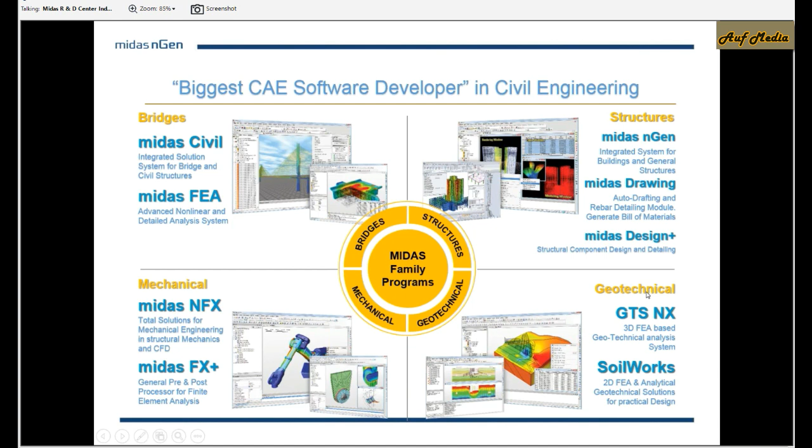Let's move ahead to the introduction to midas nGen software solutions. midas nGen is our next generation solution for building analysis and design. You no longer have to use a separate analysis tool, a separate design tool, and a separate drafting tool, because everything is included in midas nGen itself.

It's a one-stop solution like drawing to drawing. You can import an architectural drawing, then generate the model, perform the analysis, perform the design, generate the reports, also the quantity takeoff, and finally provide a structural drawing as an output. So it's a drawing to drawing all-in-one design system.

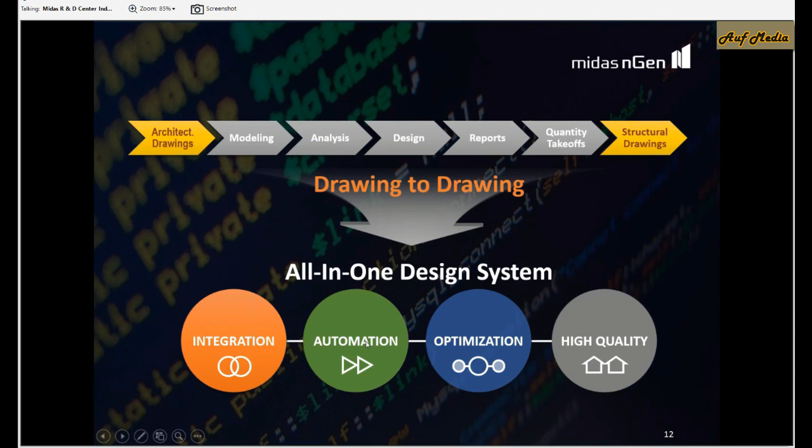Let's look at its major strengths in the parts of integration, automation, optimization, and high quality. When it comes to integration, we can see that modeling, loading, analysis, design, and output, everything is integrated into one solution.

Modeling becomes easy and fast as it has CAD-based modeling features. For loading, we have auto generation of specialized loadings like lateral loads, wind loads, and seismic loads. For analysis, we can perform multiple types of analysis in a single model file. For optimal design, we can optimize the structure by considering the rigid zones.

We can get the auto generation of the output in the form of drawings, Word file, or Excel sheets. We get the quantity takeoff in the form of Excel sheet, report in the form of Word file, and drawings in the form of DWG files.

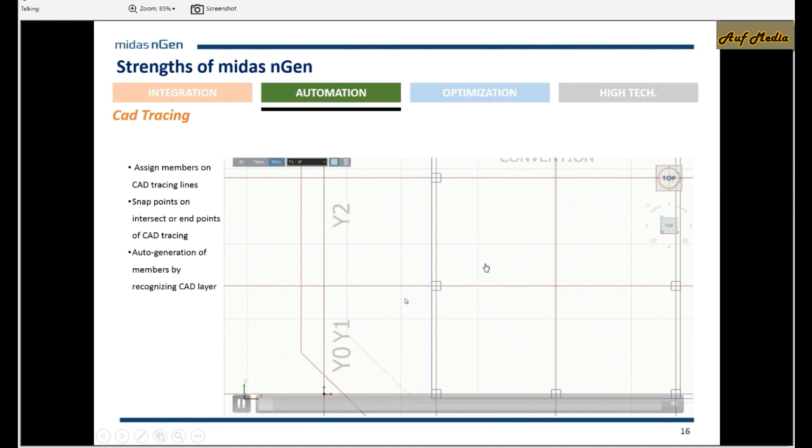Let's look at automation in the part of modeling. We have a tracing type of option that can help automatically define the different section properties of columns and thickness of shear walls. We can also trace the location of beams using the center line.

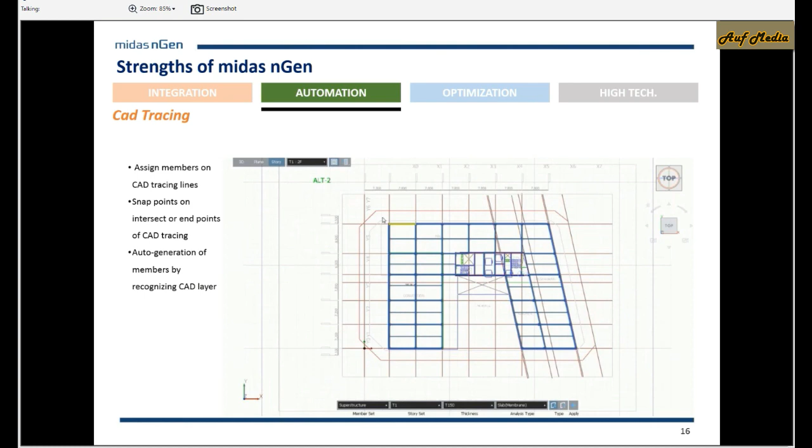We can manually draw using CAD-based features. We can trace the periphery of the slabs and generate the slabs. Whichever slabs we don't want, we can simply select and press delete from our keyboard. So that's a tracing feature, a CAD tracing feature in midas nGen.

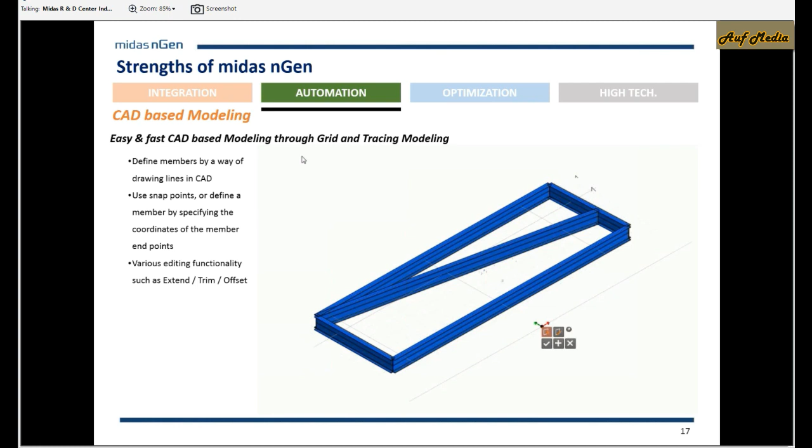There are some more CAD features for editing purposes like move, copy, stretch, extend, trim, and we can generate any shape of opening.

We can also create general types of shapes because midas nGen is also capable of performing analysis of general structures. So you can have very easy modeling.

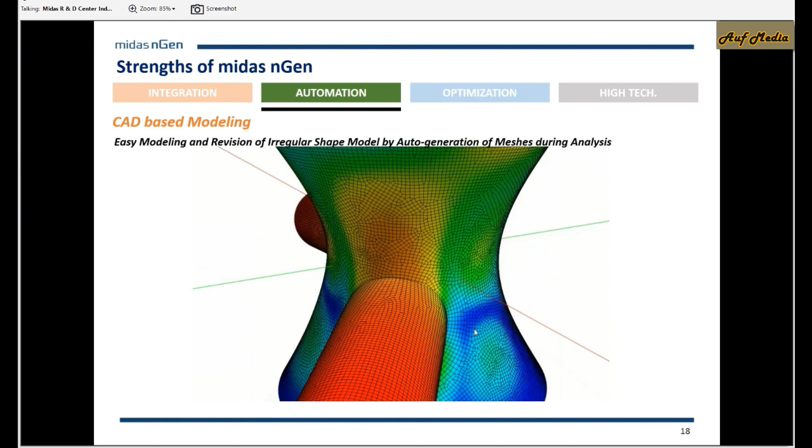The good part is that you can have mesh of any size, and that meshing can also be modified easily by simply going to the settings. There is basically an auto meshing feature, which happens during the analysis, not before the analysis.

Another good part is that midas nGen has all types of foundations: strip footing, isolated footing, mat footing. When it comes to plinth beams, you can model them as footing girders, pedestals below the steel columns. And we can also include basement walls and apply earth pressure on the basement walls.

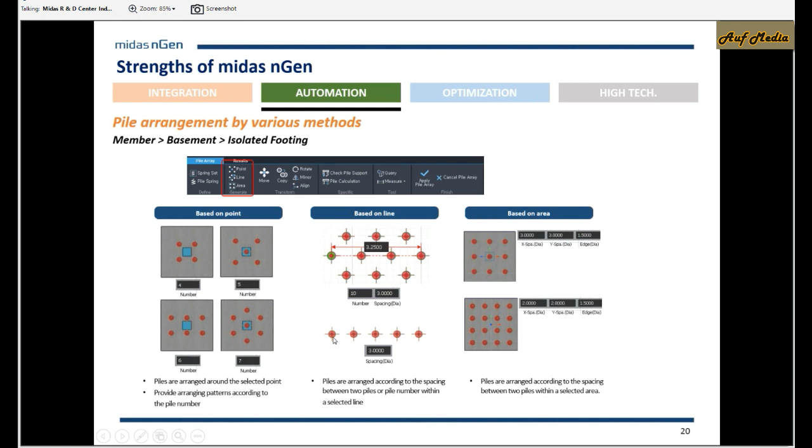Apart from that, we can include our pile arrangement or pile supports below our mat foundation, or you can call it a pile cap in that case. So that's about different automations in the modeling in midas nGen software solution.

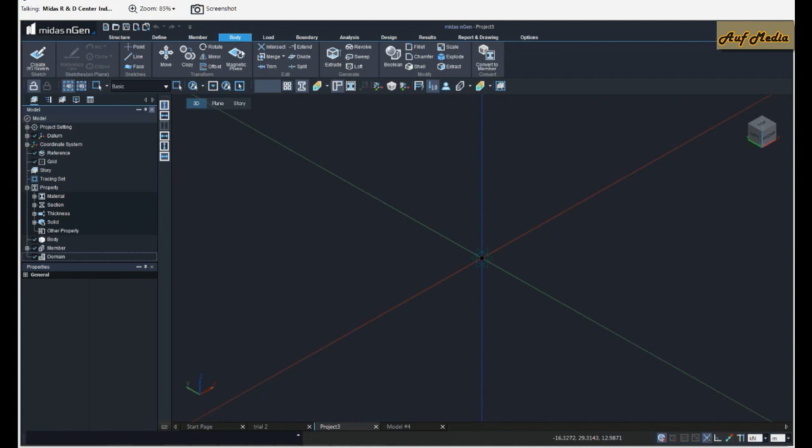In today's session, I'll be showing our 3D grid line. This is our 3D grid line basically, and we can choose the X direction, Y direction, and levels for our grid line. For example, I am having, let's say, 6 numbers in the X direction, and in the Y direction, I've got some 7 numbers of bays, and we can have different information for the spacing between each bay.

So let's say this is 6 meters. Like this, we can provide information, and for levels, we can also provide the levels and the height for each level. So I'm providing, let's say, there are 10 floors of 4 meters height. I can just click on apply and press escape to come out of the command, similar to AutoCAD.

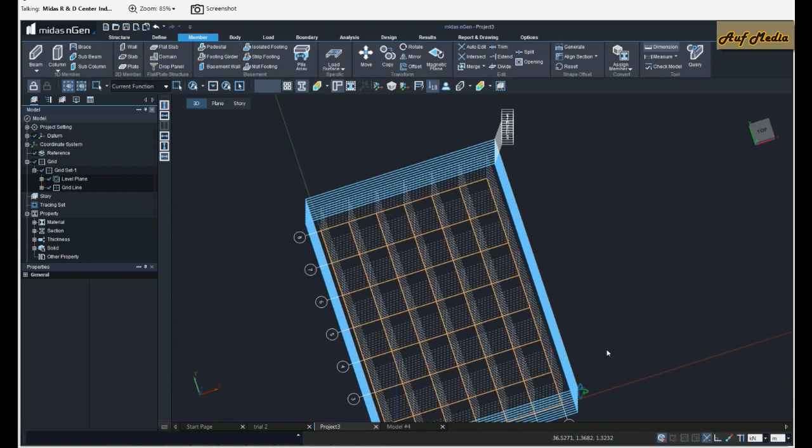All right, so here we have got this information. Now, if we would like to modify this grid line, we can do it easily. We have some options here like dimensions, wherein you can actually select the dimension for the grid lines, and they can be modified, so you can change the size.

For example, let's say over here you don't want 6 meters, you can change it to, let's say, 3 meters, press enter, and the grid line is modified. So it's that easy. Same thing over here, 3 meters, likewise. Press escape. So very easy to edit the grid line by simply changing the numbers from the display.

Another thing is about converting our grid lines into members. You can actually select the type of member you want to generate and the section property. By default, there are some section properties already generated in midas nGen, and even the material properties are predefined. Those can be modified, or you can add some more.

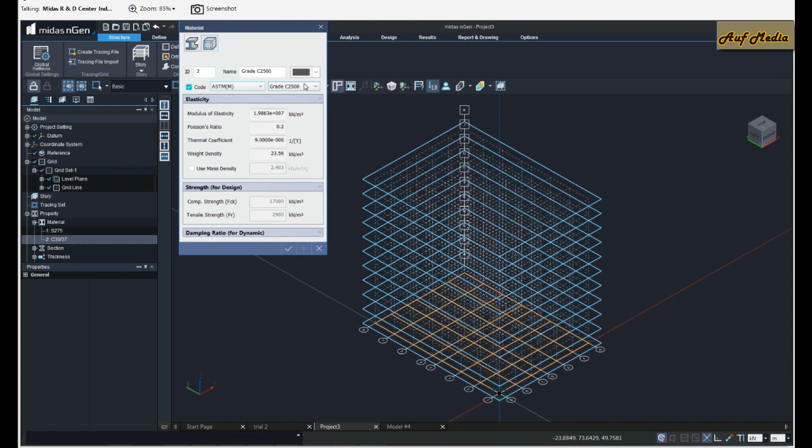Here I'm going to be modifying the grade of concrete. It's by default as per European standard. We can change it to American standard, so I'm using C4000 here, and I'll click on OK.

The section properties are also given over here, and these also can be modified. There are some thickness properties also which can be modified, or you can add some more thickness properties. For example, I would like to add the thickness for the mat foundation as 0.5, and I click on OK. So it's there. Very easy and handy tool.

Now I'll use my convert into member option to select the section size of 400 by 600, and I'll simply just make a selection for all the beam members, horizontal grid lines, and I'll click on apply. So we can see over here all the beams are generated.

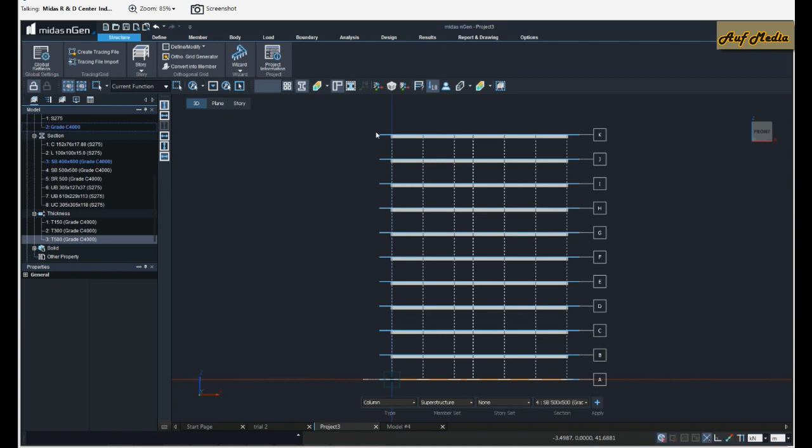Then further we can also create columns in the similar way. I'll use section property as 500 by 500 and select the entire floor plan. Apply. Okay, so we have got our beams and our columns. I can press escape to come out of the command.

And let's also make some shear walls. I'm going to make shear wall at this location, and that's why actually I reduce the size. I'll again press spacebar to come back to the same command. So if you are into modeling, you can understand how easy it can get if we have the same features as AutoCAD, like spacebar to come back to the same command. So wall, here we have got wall. I'll change the thickness to, let's say, 300.

And we have different types of analysis for wall. Now, wall will definitely be designed as a shear wall in midas nGen, but when it comes to the analysis, there are different methods. We have wall membrane, plate not meshed, which is a shear wall made up of rigid beam at the top and bottom connected by a long column. And then there is wall plate meshed, which is a plate element itself, which will be meshed by the program while analyzing.

Here I'm going to be using wall plate meshed, and we will just simply select the periphery of the shear wall. So I've just selected this periphery right over here, and we can also look at the preview of our shear wall, which is going to get generated. And then I click on OK. So I've got my shear wall modeled.

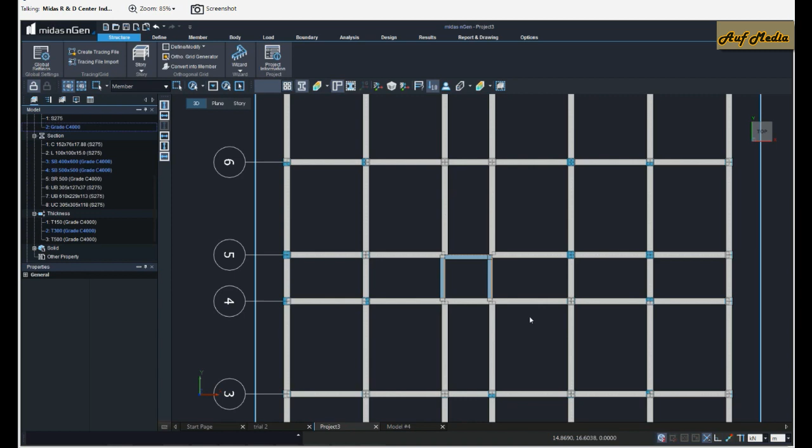Now I do not want the beams and columns surrounding it, so I can actually choose to delete only my beams and columns by making a selection filter. I'm just going to be selecting beams and columns in these locations and simply press delete from the keyboard. So here we go. We have got our shear wall as well.

Okay, now let's get to generating the slabs. So we can go to the member, go for slab option, and we can select all the periphery beams. Here I am going to use 150 thickness for the slab, and I'll use slab plate out in, as in it will take the in plane as well as out of plane stiffness. If you want to take only the in plane stiffness, then slab membrane should be used.

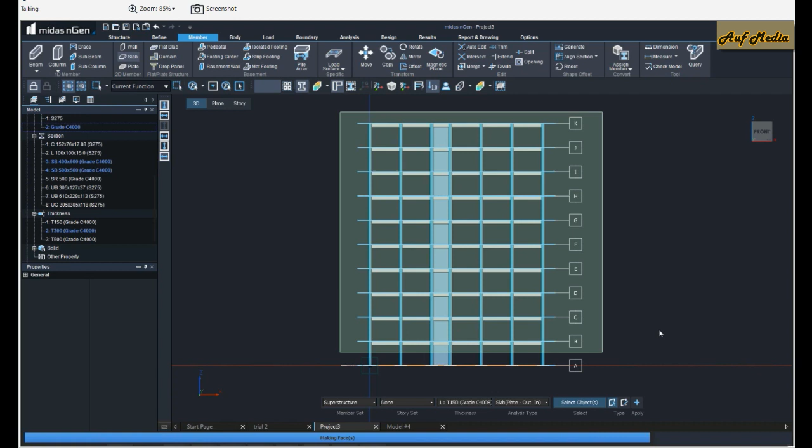Okay, and then I'm just going to select all the beams. The program will automatically detect the periphery and then only create the slab members. We can also generate these slabs using the periphery grid lines, so that option is also available. After this, we can just click on apply. Basically, the program shows us a preview, and then we can go ahead, click on apply if you're okay with whatever is going to get modeled.

Okay, so our slabs are there with us. While performing the analysis, the program will automatically do the meshing of these slabs. Now, the locations where we do not want the slabs, we can just simply select and delete those locations, or we can even create the openings. So these are certain options available.

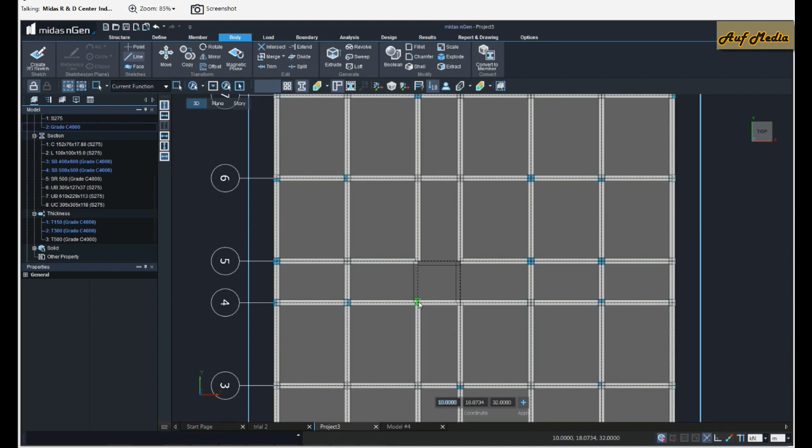So if I go for the line over here, I create the periphery of my opening. So let me go to this plane view and go for a line. For example, I'm creating... so basically we can either create lines or we can even select the periphery. So here I'm going to go for the member opening, and I can do the selection, and I can say apply.

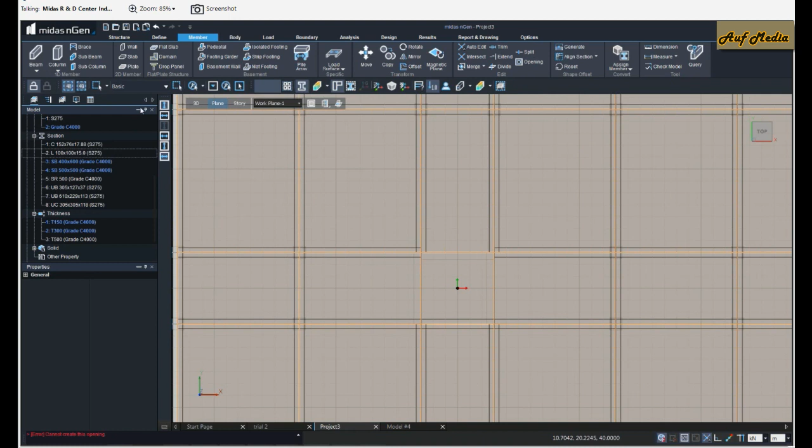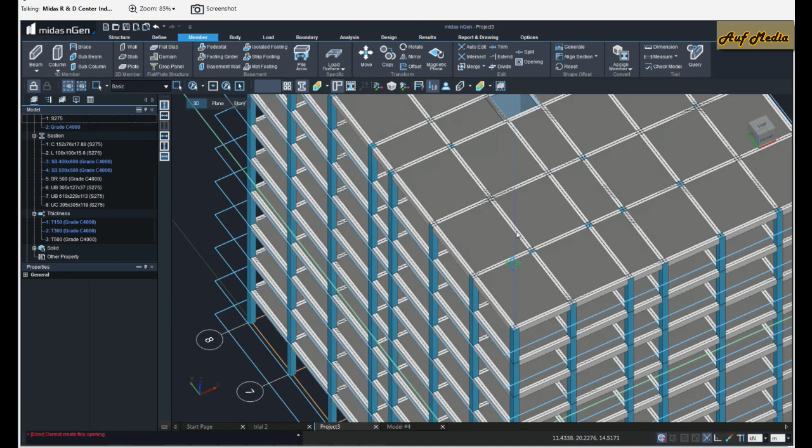Let me go for basic so that it's properly selected. Okay. 2D. Okay, and then press delete from here. All right. So we are done with creating the openings as well, wherein the shear wall was placed in between. Now, if there are any further modifications, we can do that.

For example, if you want to make an irregular floor plan, you can just delete some parts of it. For example, I'll just delete this much portion, and you can make it L shape or any other T shape, maybe perhaps like this. So I'm just making it an irregular plan. All right. And further, you can simply go ahead with generating the stories for it.

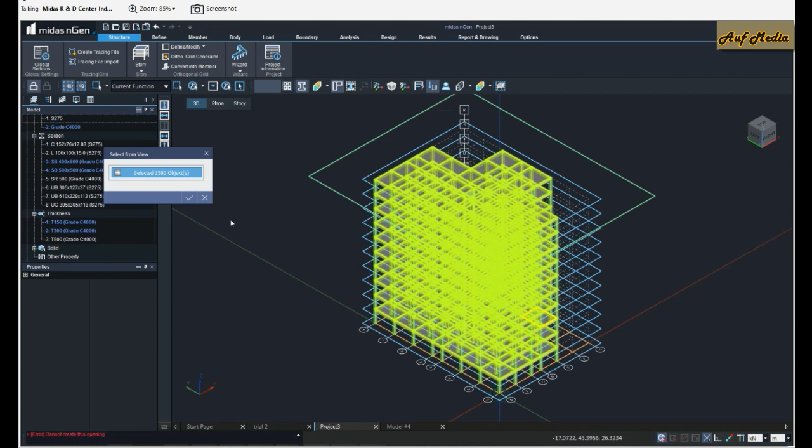Now for generating the stories, you can go to the structures and story data and add this information, and you can even auto-generate the story data. No need to manually provide the information. Just select the members and click on OK. The program will automatically detect the height. The height can be modified from here. The floor-to-floor heights of each floor can be modified from here.

Now we do not need the grid lines anymore, so I'll just hide the grid lines. And we can go to any story using this story mode to do any modification. For example, I would like to add my mat foundation on the lower level. So I can go to the story and 1F level, and I can go ahead to add the member for my walls, for my footing. So I'll just click on the periphery.

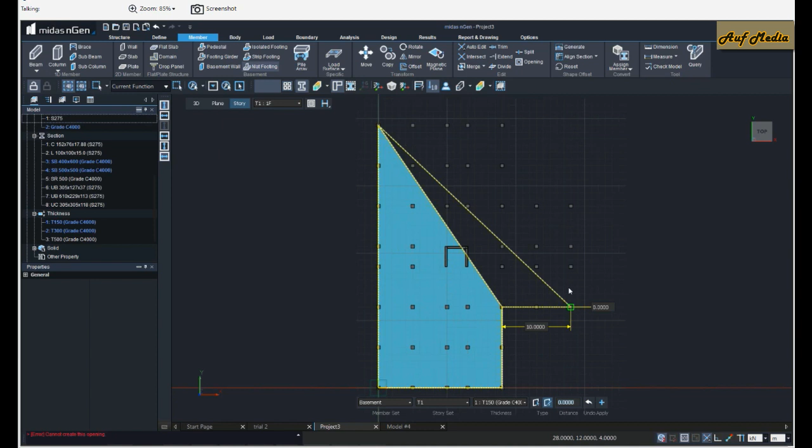I'm sure I need some offset. So for that offset, I can provide a distance here of, let's say, 1.5 meters and press enter. So I've got my mat foundation with offsets. I can also include pile. Now piles over here cannot be designed. These are only to apply the spring support to our pile cap.

So I'll go ahead with definition of a spring set here and pile springs. So we have a database of Korean standard and Japanese standard, so you can use it if you want, but I'm not going to use that. And I'll keep the information for the pile as it is right now and use the pile bearing capacity information. So let's say each pile has the capacity to bear 1000 kilonewton of compression and 100 kilonewton of uplift.

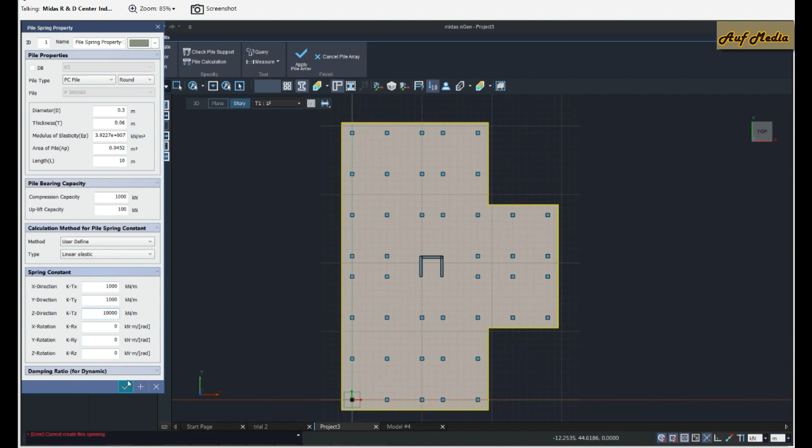And then the spring constants I can provide over here. For example, I'm providing 1000 in the X and Y direction and 10,000. These are just arbitrary values. Of course, the actual values would be different. Okay, so I provided the spring set and pile spring information. And now let's say I want to apply the piles just below these columns. So I have various options to generate these piles. I can do it by point, I can do it by line, area, and so on.

So I'm going to be selecting point, and I'll have the selection tool to select all the locations right below the columns. Okay, so this is selected right now, and I'll click on apply. We can also change the number of piles over here. So let's say below each column you would like to have two. So you can write 2, and as you can see, there will be two piles below each column. So I'm making 1 for now, and I'll click on apply.

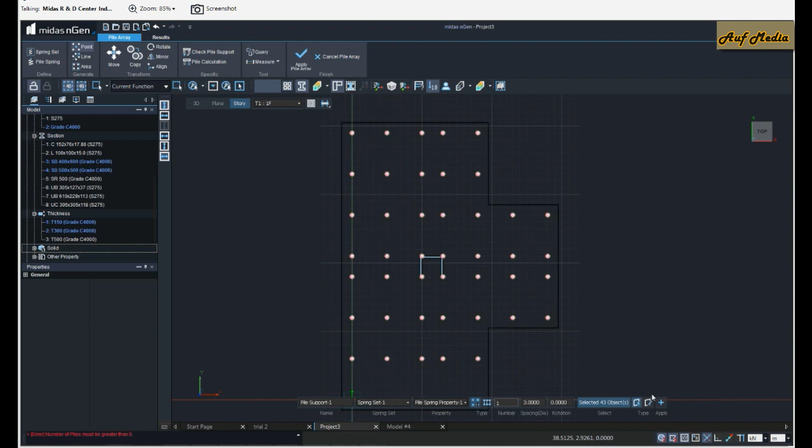So modeling these pile supports is actually very easy. I'm pressing escape, and then we just simply click on pile array apply. So we have got our piles just below our entire structure. So after this information is completed, we can simply go ahead to the next part of modeling. Well, we can also choose basement walls. So if you want basement wall, there is a basement wall option available as well.

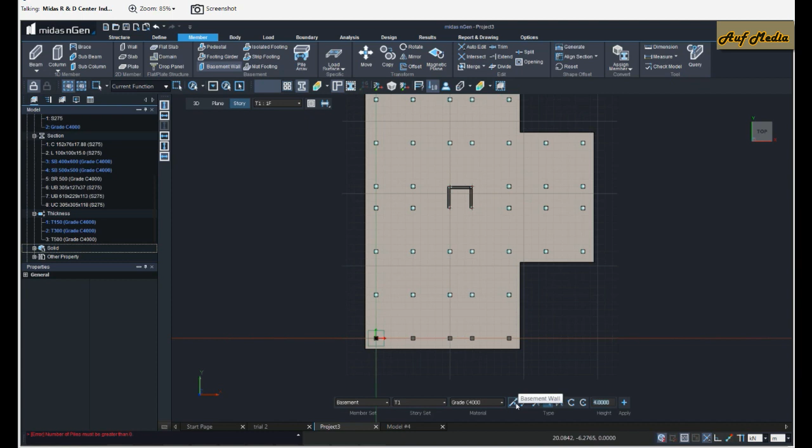Well, we can go to the T1F and you can model the basement walls by using reference lines or by using select parallel lines and so on. So there are different options available. Okay, so you can choose basement wall here, and then you can click on 2 points. And you can just make the basement wall in this way.

So easily create the basement wall. Modeling actually becomes very easy in midas nGen software for all the types of members. Okay, so this is, oh, I missed that other part. Anyway, so basically this is how we can do the modeling of the basement.

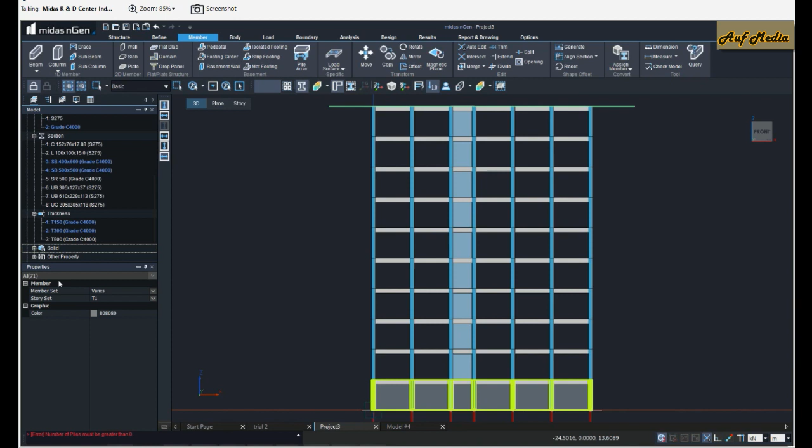And I'll get back to the 3D mode now. We have our entire structure. So let me also see, I think I've provided incorrect thickness for the basement walls. I'll select the basement wall and I can modify the thickness from this properties menu. So I made it 300 and that's it. So easy modification of the properties for any member can be done over here as well.

All right. After this, we can move ahead to the next part, that is loading. In the loading, there is load set command. So you just have to click on load set. The set, that is a static load set, is nothing but our load case. Why is it called set? Because it's also like a group which can be activated or deactivated in an analysis case.

Okay, so we have one load set applied, and then we can apply point loads, beam loads, pressure loads, temperature load, settlement, and arbitrary loads. Arbitrary loads would require just creating some faces on the floor, and then you can apply any pressure load on it, or line load wherever the lines are created, or point load wherever required on the slab.

Now, when it comes to slab, be it a simple type of slab or a flat slab, you can also assign slab load by using types option. You can include your dead loads as well as live loads in the same type. You can create as many types as you want. So here I'm creating a typical slab load type with floor finish of 1.5 and live load of 2.5. These are arbitrary values, of course, it would differ with your projects. And then further, okay, let me save this model file.

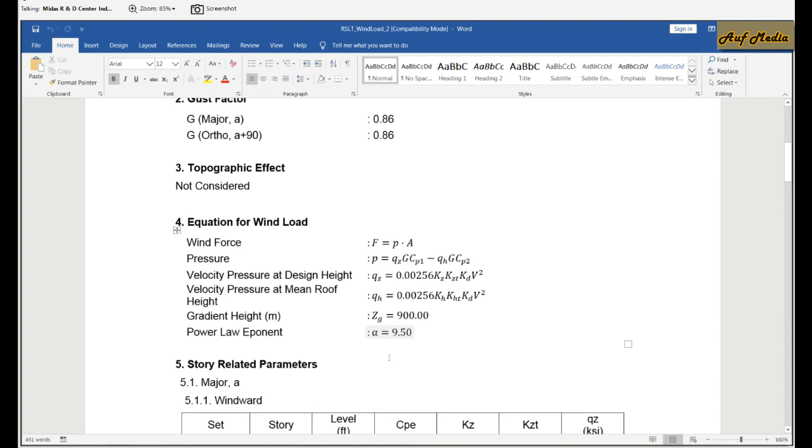Only the external pressure will be considered here. And it is going to be windward and leeward, orthogonal in the direction. So you get all this information in the Word file format itself, and you can click on OK and then use it for the structure. You can even look at the forces applied before performing the analysis.

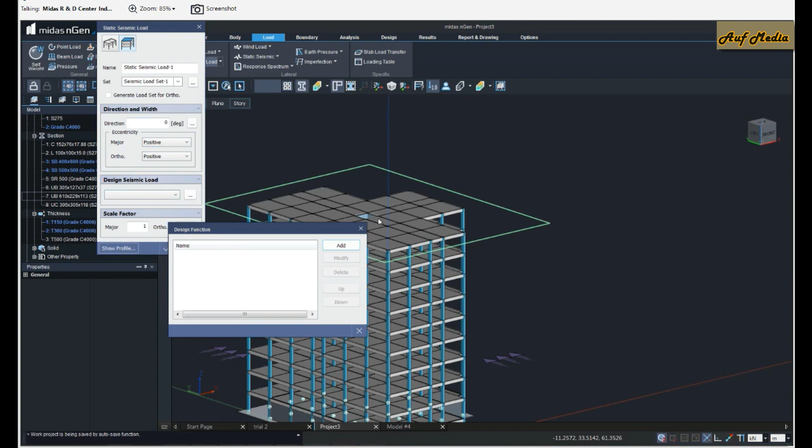Okay, so after this is done, we can go ahead to static seismic load. And again, the static seismic load can be automatically calculated as per UBC or IBC or ASCE 7-05 or 7-10. So if you're using UBC 97, you can select the soil profile. You can select the seismic zone, 2A, 2B, whatever, and then importance factor, and also approximate period, which can be calculated automatically as per the required formula.

So you can simply press on calculate and the calculations would be done. You can also manually provide the value of the approximate period. The ductility factor can also be modified over here. For example, 5, and then click on OK, close.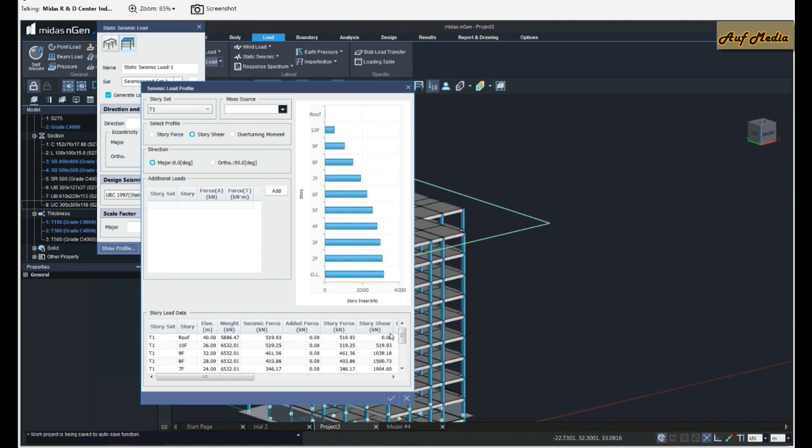You can apply the seismic load in both X and Y direction at the same time using generate load set for ortho and providing a scale factor for the orthogonal direction. You can look at the profile of the base shear. So this is the base shear even before performing the analysis. Okay, and you can click on OK and OK so that the seismic load is applied.

Now, when it comes to seismic loads, you also need to perform the loads to mass command, as in you need to convert your 100% dead loads and 25 to 50% of the live loads. So I'm converting 25% of the live loads into masses, and that's it. So the masses are also automatically calculated by the program.

All right, so that was about the loading part, wherein we saw how the lateral loads, that is wind and static seismic, can be applied. Now, if you're using the wind tunnel test loads, then you can go to the show profile over here and apply additional loads for each story set and stories separately. There is an Excel copy paste option as well to do this very easily. That's about wind tunnel test results that we can apply.

Okay, so that was about the automation in the loading part, wherein we saw that the wind loads can be applied on building structures, on enclosed open structures, and we can also apply on equipment-based structures by converting the forces from reactions. Now here we are having automation for the seismic load as well. Static seismic we saw, but there is also response spectrum.

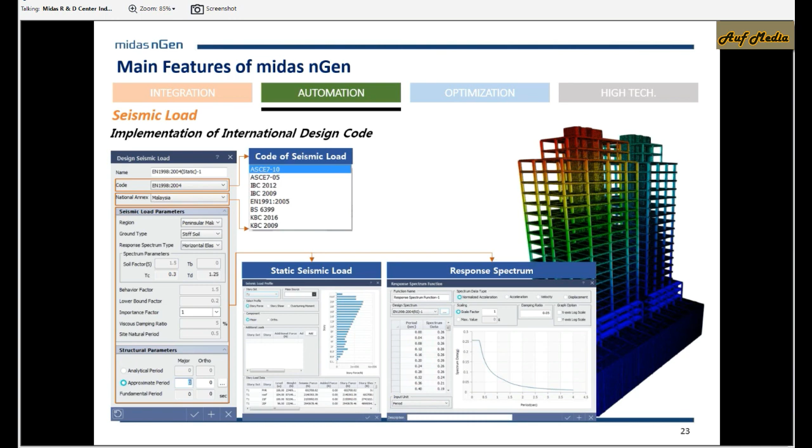And now let's come to the optimization, wherein shape offset can also be automatically applied by the program. So for that, we can go to member and we say generate, and for that we need to basically select the entire structure. So I'm selecting everything and I'll click on apply, and the offsets will be generated by the program, as well as the rigid zones.

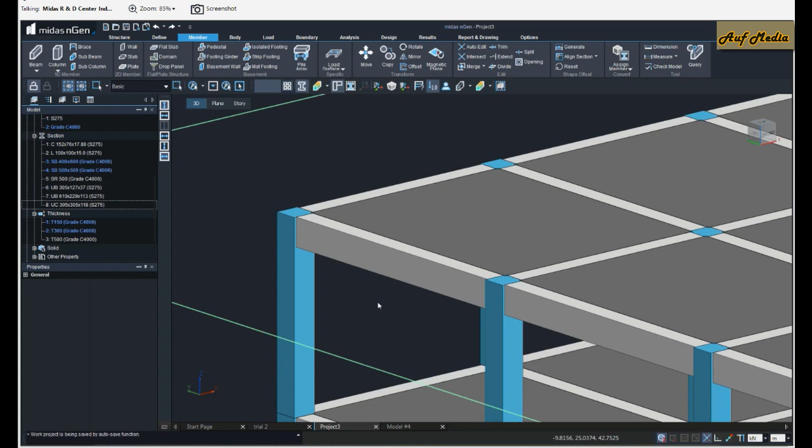One good part is about aligning as well. We have this align section option, wherein you can select your beam and select the plane and then assign it or flush it to the required plane. For example, flushing it to this column. So this is how easily we can create the offset to the beams. So it's an easy feature. I've undone it. And next part in the loading is about earth pressure.

So in the earth pressure, we have earth pressure function, wherein you can specify what is the ground level. So let's say 4 meters for our structure is the ground level. The water level is, let's say, at 1 meter height, and the bottom level is 0. Soil density is 18 kilonewton per meter cube, and internal angle of friction is, let's say, 30 degrees. And if there is any additional load on ground, you can add that as well. For example, 5 kilonewton per meter square. And then click on calculate. The triangular and trapezoidal loads will be automatically calculated by the program.

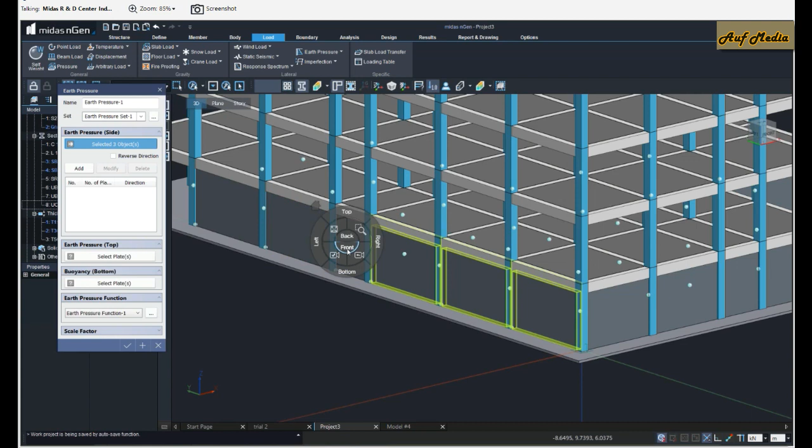Now, once this earth pressure function has been auto-calculated, you can simply select the basement walls and apply the earth pressure function on them. So I'll select these basement walls and I'll just say show only. It's basically easier to do this option. We can also apply to plate type of shear walls, but I'll be applying it only to the basement wall. So I select this basement wall, I click on add. The earth pressure is going to get applied from outside, so it's correct from here. I can select this, click on add, so it's correct.

So we can add one by one to understand if any part is to be reversed. So we can reverse this and again add over here. I think reverse would be required for this as well. So modify. Okay, reverse this. Okay, I think this one also requires reverse, and so would this. Okay, so we have applied the earth pressure loading. We can apply the earth pressure loading in this way.

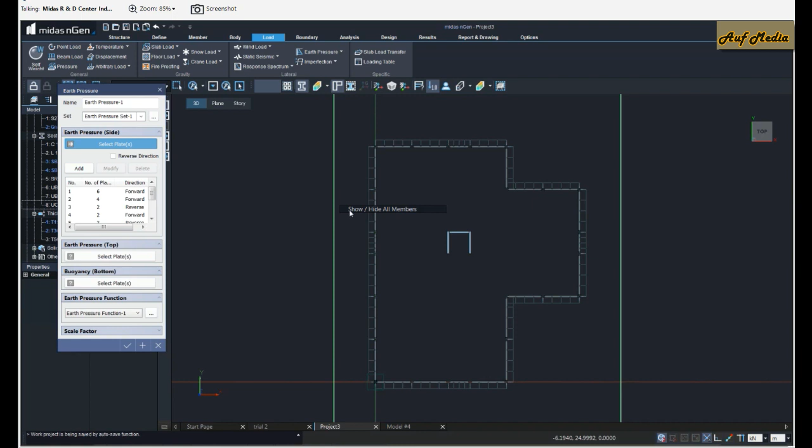And we can also consider the buoyancy at the bottom. So you can select the plates for the buoyancy. So there is buoyancy bottom. You can select and you can just click on OK. So in this way, triangular trapezoidal earth pressure loading and buoyancy loading is applied to the basement wall and the mat foundation. All right, so this is one part.

Next, we'll go ahead to the boundary conditions now. In the boundary conditions, there are supports that we can apply, like the fixed supports and the pinned supports. These can be applied to the structure.

Okay, so that's about the support conditions, fixed, pinned, or user defined. And beam end releases, plate end releases options are there. Then there are soil supports that you can include for simulating the soil structure interaction, approximate type of soil structure interaction. There is area type of distributed spring supports as well that can be applied to the face of our mat foundation. So if you want, you can include this information as well.

Wherein the modulus of subgrade reaction is supposed to be applied. So let's say 20,000 kilonewton per meter cube. Okay, and if you do not want to allow any lateral displacement, you can even constrain its points, end points, or all the points by using point spring support or even using the simple support. Okay, so if I go for properties, I can actually have a high stiffness for my X and Y direction just to constrain my X and Y direction for my foundation.

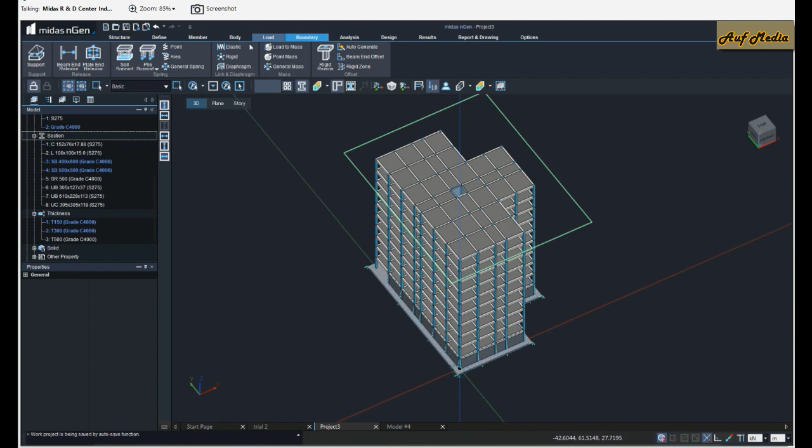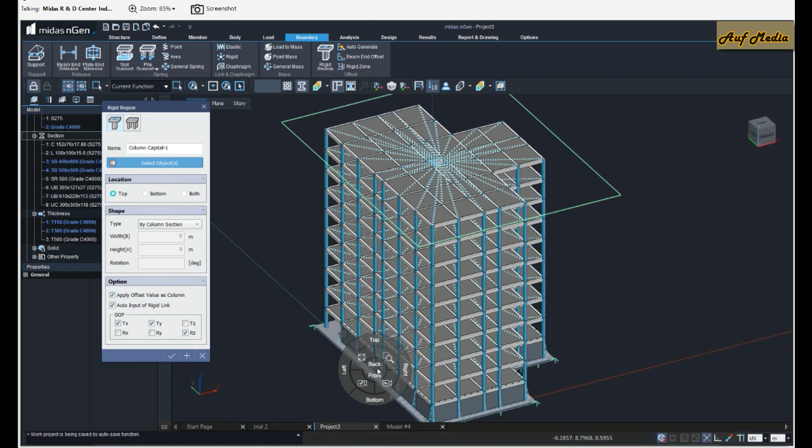Then coming to the diaphragms. So diaphragms can be assigned manually as well. So simply select over here the locations where you want to apply the diaphragm and click on OK. The diaphragms also have been applied to the structure. Coming to the rigid region. Now, when we have got flat slabs or mat foundations, we don't want the line elements to pierce the, or to have high stresses at the connection between the mat foundation and the columns.

So we have got the bottom column section shape with automatic rigid links. So I'm going to be constraining completely, making a rigid zone between the column and the mat foundation. I'll select all my columns over here in this way, and I'll click on OK. And after this is completed, I can simply go ahead and say auto generate so that all my rigid links or my rigid zones basically will be activated, and also the offsets will be considered for the analysis purpose. So this is done. One last thing, I have to also do the modification of the thickness of my mat foundation. It's T500. So now it's complete.

One more thing, I want the program to consider the basement, or the ground level at 4 meters. So I'll have to go to the story and change my control data to 4 meters. I can also choose the options like consider mass below ground level and I can also have inherent eccentricity applied or calculated by the program. Okay, so there are various options available in midas nGen. We are done with the modeling, the loading, and the boundary conditions. Now we can go ahead to perform the analysis.

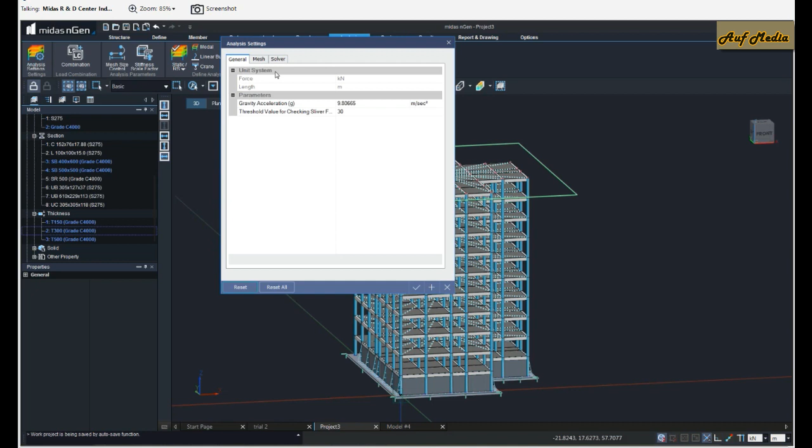Okay, so here we can basically start the analysis settings wherein the mesh size can be controlled. You can also have separate mesh size control on separate members. And you can also choose your number of processors for speeding up the analysis. You can generate the load combinations for steel and concrete separately as per American standard. So here I'm going to change the code to American standards, and we can also choose what kind of rebar we would like it to use. So if you're using ASTM or BSEN, any type of grade of steel reinforcement can be utilized.

And further, there is some checking controls option available. For example, member forces for our mat foundation and for our slab. So you can actually choose if you want the results for element center, nodal results, or nodal average results. And the average design for Wood-Armer moments. Wood-Armer moments basically would consider flexural and torsional moments. And for that as well, you can have the average design forces included for the design purpose. So these are various options available in midas nGen.

All right, so I've used ACI standard to generate automatically the load combinations. So strength as well as serviceability load combinations would automatically be generated. So I'll close this and then we can move ahead for the analysis. Now you can have as many analysis cases as you want for one single model file, which means that you can have, let's say, the entire structure with a fixed support condition, or this entire structure with pinned support condition.

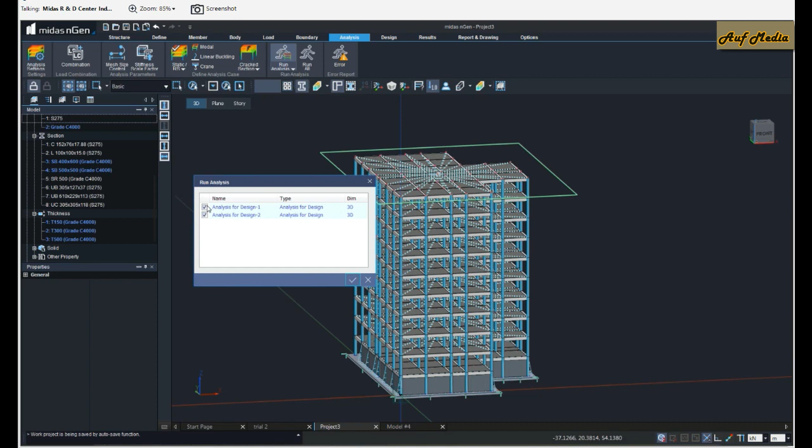Now let's go ahead and run the analysis. We can choose which analysis we want to perform for the design purpose. And I'll go ahead and perform the analysis number 2. This is only to reduce the time for analysis, as there are many members here, and the meshing is also going to take place for all the elements.

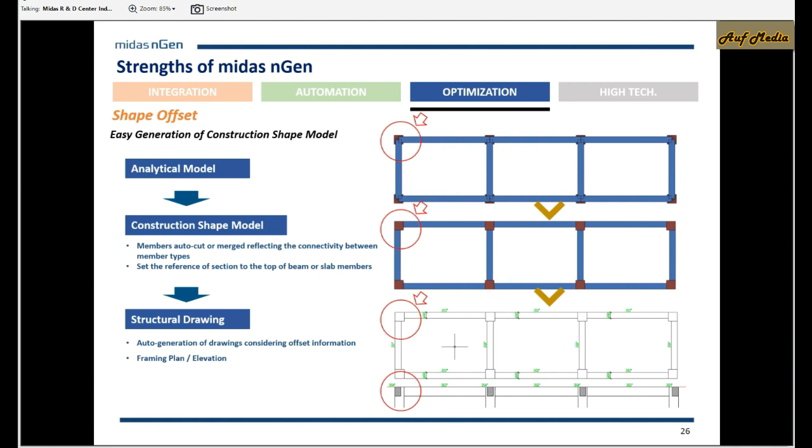Okay, so by the time the analysis is taking place, let me get back to the presentation and let you know that in midas nGen, when we had the tracing modeling option, you can also choose the offset while tracing. Okay, so for example, you have got the center line of your beams, and also you have got the shape of your columns. So if this is the second picture which I'm encircling right now, if this is how your tracing file is, then this offset for each column will be automatically assigned by the program. So again, that's an automation that can be very much useful for making the structure more practical. Okay, so that's one thing.

Next thing I would like to talk about is the wall columns and the plate beams. So when you have got long walls, let's say 1 meter, 2 meter long walls, then those are better to be analyzed as elements. Okay, so we have that option, wall column option, wherein the program will perform the analysis as meshed plate elements, but the design of these walls will be as a column. Okay, so you'll get the column design out of the wall.

Then we have plate beams similarly, wherein you can use it for deep beams or for assigning the drop slabs. So in this case, you have got again plate elements for the analysis, but the design will take place as a beam member. Okay, so that's also an optimization. What all codes do we have for the design purpose? So we have got American Standard, European, British, and Korean Standard in midas nGen for steel and RC design.

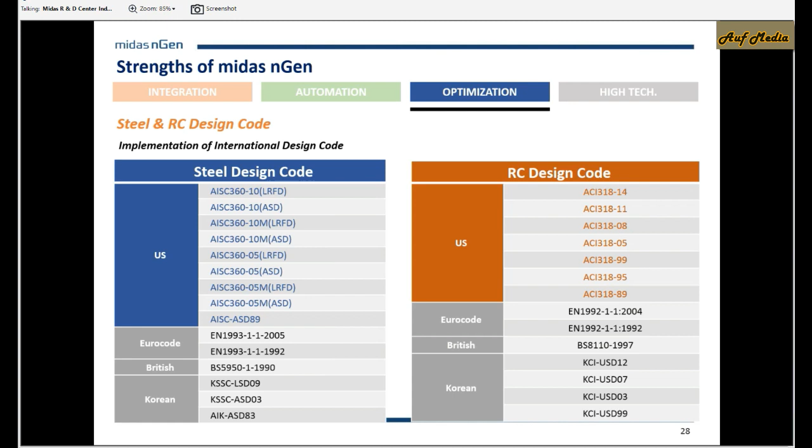And we will finally generate the high quality outputs. We have seen one type of output, which is the Word file output regarding the loads that have been applied, the lateral loads. Okay, the analysis is completed. Now let's look at the results. The analysis results can be easily seen by just expanding the analysis results from the tree menu and double clicking on it. Let me hide all the information labels. Okay. All right. So we have got our analyzed structure.

You can deform it. So this is the deformed shape. You can see the legend over here. You can change the unit system at any point of time. And you can go to any load combination from here as well. So let's say for the serviceability condition, we have 15.78 as the displacement. That's in mm. Okay, you can also display the value on the screen so you can see easily what is the maximum value and where it is. Then we'll go ahead to the results like the reactions.

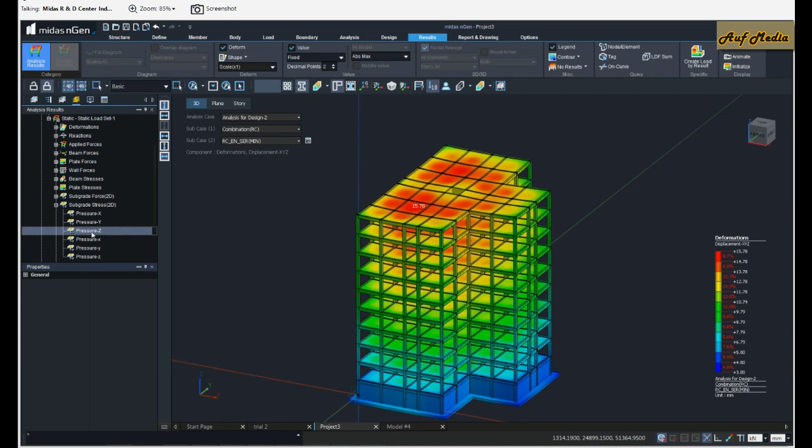Well, when it comes to mat foundations, we need to check the subgrade stresses. So the vertical pressure for our subgrade would also be applicable here. I think it has not been used for, okay, it's available here. All right. So we have got the plate stresses and so on available here.

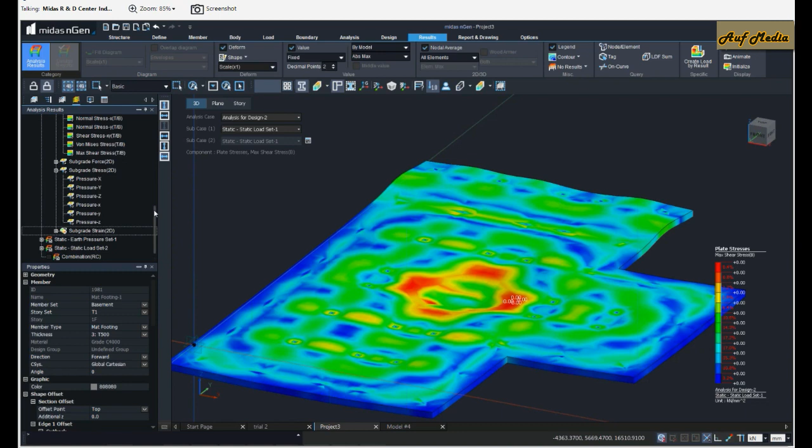So von Mises stresses at the top and at the bottom can be seen separately, and shear stress at the top and bottom can be seen separately. You can actually activate only the mat foundation and view it separately. Care has been taken that the rigid zone is maintained. So that's about the pressure and stresses in the mat foundation.

This subgrade stresses would be applicable when we have applied the boundary condition of soil support. So that's one part. Next is about the beam forces.

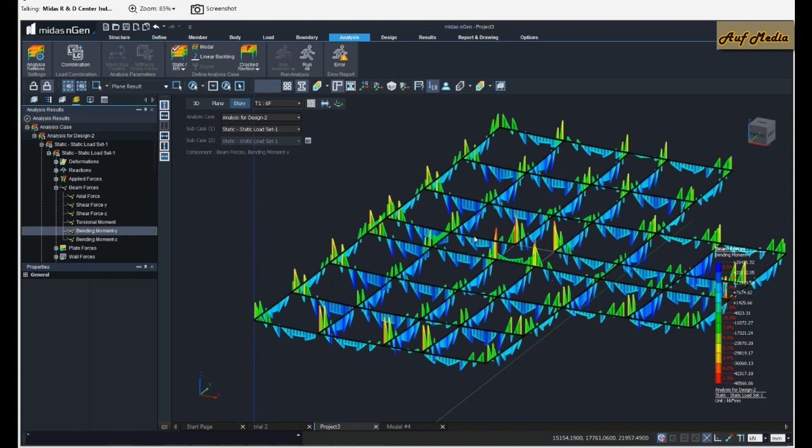If I go for beam forces, bending moment diagrams, we can see that information. We can even go story by story. I'll go to, let's say, 6F level, for example. As the beams are divided into a number of parts because of the meshed slab, we are able to see spikes here, but we can also see a smooth level if we want in the results part.

This is by model, this is by element, and this is by member. So you can see the values for the absolute max. Just change the unit system to meter, kilonewton meter. So yeah, that is it. I'll just do undeformed shape.

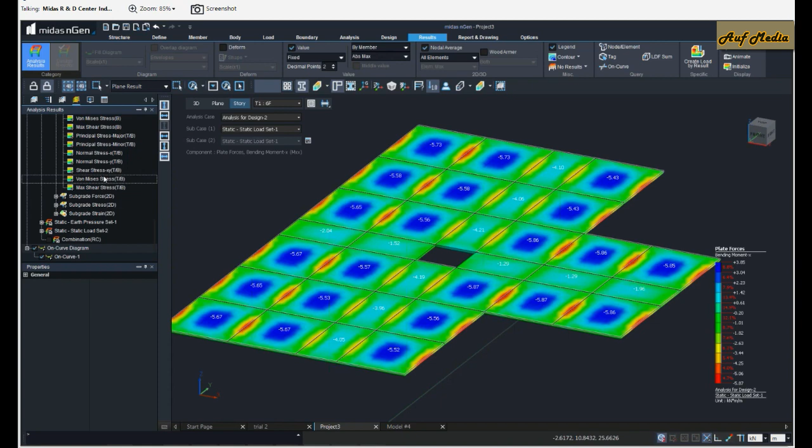One more thing I would like to show is about the forces. Let me show the plates and let's say the bending MXX. You can see the MXX values, and you can also have an on-curve diagram. You can click on 2 points and create the on-curve, and you can get to see the values on the screen for any information. So that's about the on-curve diagram.

And then further we have got different types of options, like there is a tag option. You can actually click on a particular element and look at the results, the values, over here. So that's about the results in the display form.

You can also get the results in the form of tables. For example, you can get the information of nodes and elements in the form of a table, and the deformations as well. You can select the nodes for which you want to check the results, the reaction displacement results. You can also check applied forces, beam forces and stresses, plate forces and stresses, boundaries, and if there are any virtual walls, subgrade reactions, subgrade strains—you can use the tabular information. So that's about the tabular results that can be taken out as an output.

Now we'll go to the design part. In the design, again, we have got different standards available that we already saw. Combination already created. Design groups can be automatically generated for the entire structure. So I'll just click on OK, and the groups would be generated for all the members automatically.

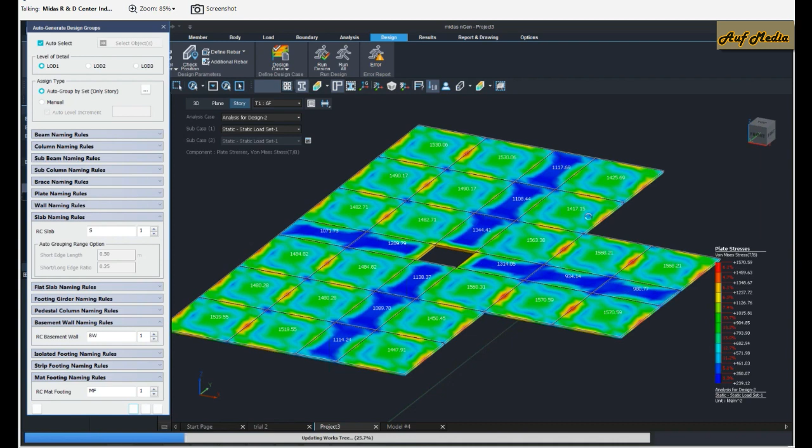So even though we have activated the entire structure or not, the groups would be generated. I'll just initialize the entire structure so that we can see the groups. So there are groups over here based on each story and the section size, section shape.

And further we can go ahead back to the design tab, and then there are member parameters which can be assigned to separate members. We can define the rebars to our plate elements, like the basement wall or the mat foundation, or even our slabs. So here I'm going to create one design case using the analysis for design 2, and you can see here all types of groups are there.

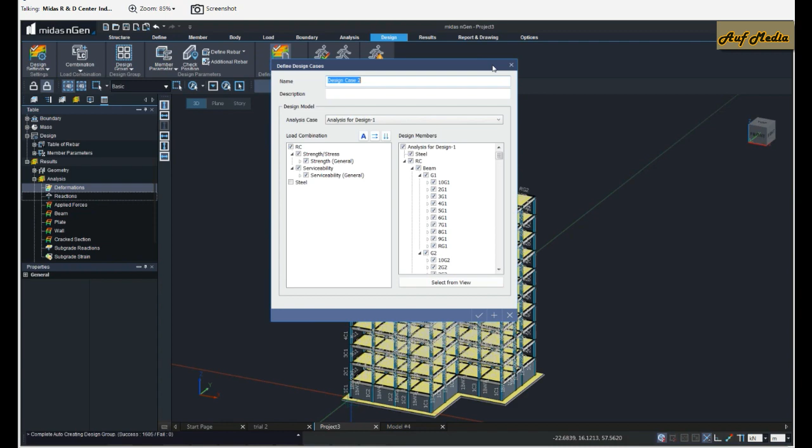I'll just click on OK, and then I'll go to the design case—sorry, run design. And I can also have the rebars automatically generated by the program. I can have complete control on the design. So depending on the section depth over here, for example, I have got

0.6 as my section depth. I can choose that, let's say P16 is my minimum diameter of bar that the program shall use. Number of layers, well, 2 is the number of maximum layers it can use. We can change to 3 numbers at the max. And then the shear rebars, the spacing for the shear rebars, can be controlled, and so on.

Similarly, for the plate elements—sorry, wall elements—you can choose. Let's say P13 is the maximum rebar for the walls. I'll go to the rebar section, and I can change or add the number of diameters of bars that the program is allowed to select. So here now in the walls, maximum I can select P20, 25, likewise for the design of shear walls.

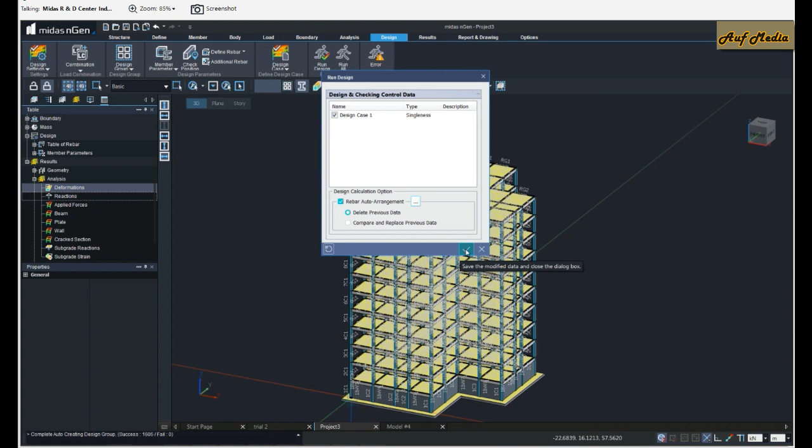And the same thing is applicable for the basement walls. So I can select likewise for the mat foundation. Also I can select, and then I'll click on OK. And then we can go ahead to perform the design of all the members included in that design case. So we can actually have multiple design cases for a single model file.

You can choose to perform design for only the mat foundation or only the basement wall. Likewise, you can choose only those groups and perform the design for those members in the group that we have selected. That will also reduce the time required.

While the design is taking place, let me look at some questions.

A question is regarding optimal design for steel structure only. We will soon be having it incorporated in the program. Midas nGen currently does not have optimal design for steel.

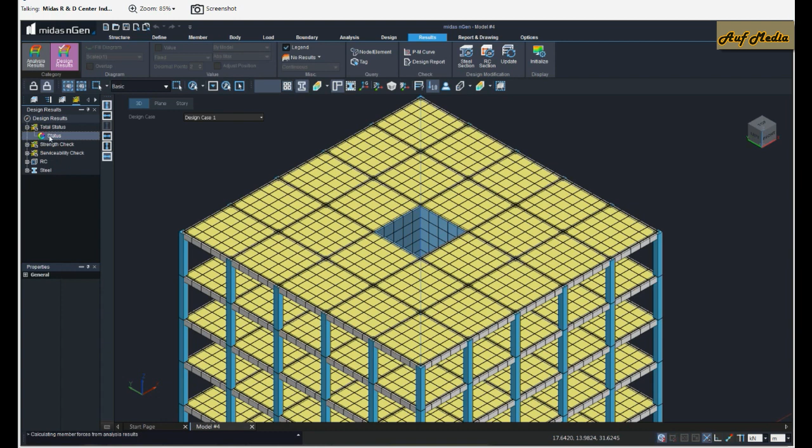Let me go ahead to the part of design. After the design is performed, we can get results like this, the total status, wherein you can see which members have passed or failed, or which require check. The mat foundation seems to be failing, but the basement walls are passing, and the rest of the members like columns, beams, and slabs are all passing within the specified limits.

There is a strength check separately, a bending ratio check separately, then shear ratio. The shear ratio is pretty high, 3.59, for our mat foundation.

Then there is a serviceability check available, and we can also get the results in the form of a detailed Word file report. Let me show you about one beam, one column, one slab, one shear wall, a basement wall, and a mat foundation. After I click OK, a Word file will be generated for the design, showing the design results of the selected members.

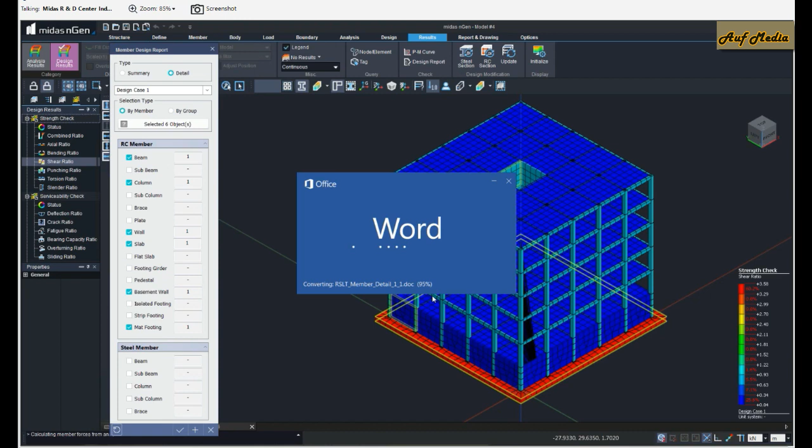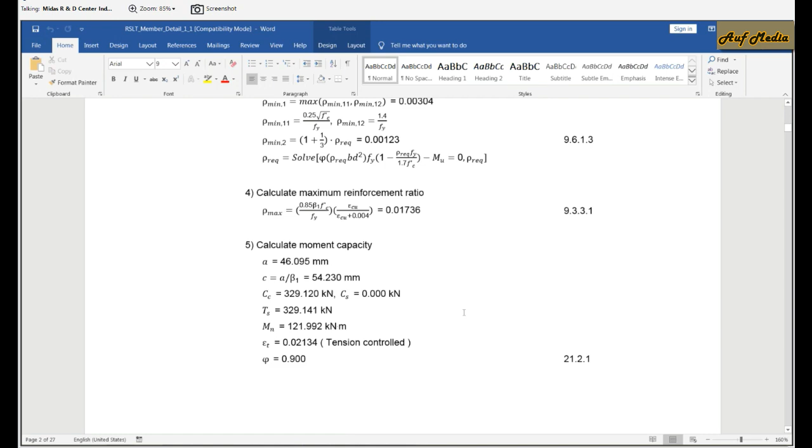So this is the Word file generated by the program. You can see the rebar arrangement, and we can see the formula and also the subclause numbers. That's about the detailed design report that the program is capable of providing.

It generates a separate design result for the basement walls. So that is getting generated right now. That's about the detailed output.

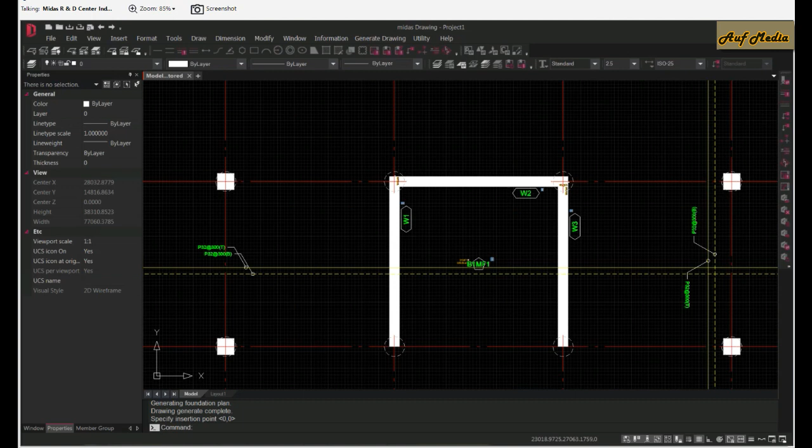You can see over here, this is the rebar arrangement results that the program has provided. You can look at the pile locations as well; it will be dash type. So if the location is somewhere else, you can get that information also. You can get the structural plans of centerline plans and floor plans of any location.

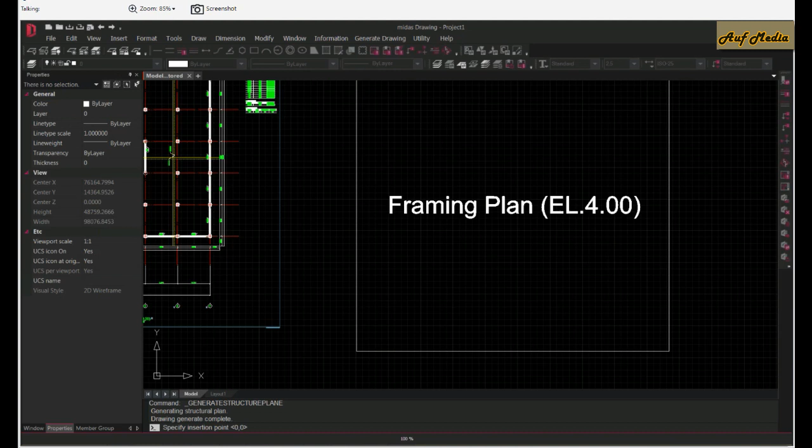That's the floor plan. Then we can also generate the rebar arrangements for beams, columns, walls, and basement walls as well. For example, selecting a beam over here, you can actually get the bar bending schedule as well for the beam rebar detailing.

The workspace that you see here can be used just like AutoCAD. So this is a rebar arrangement that we can see for the top and bottom with the splicings and development lengths. And you can get over here the key plan, and you can see the sectional arrangements as well.

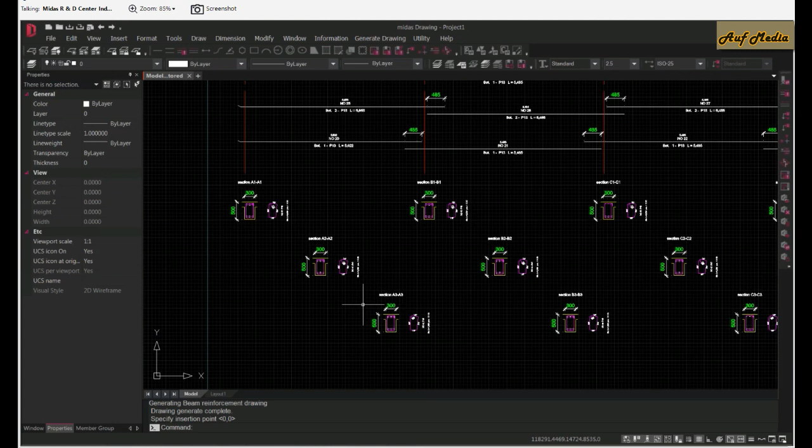So this is how it will show. And we also get the bar bending schedule and rebar quantity table.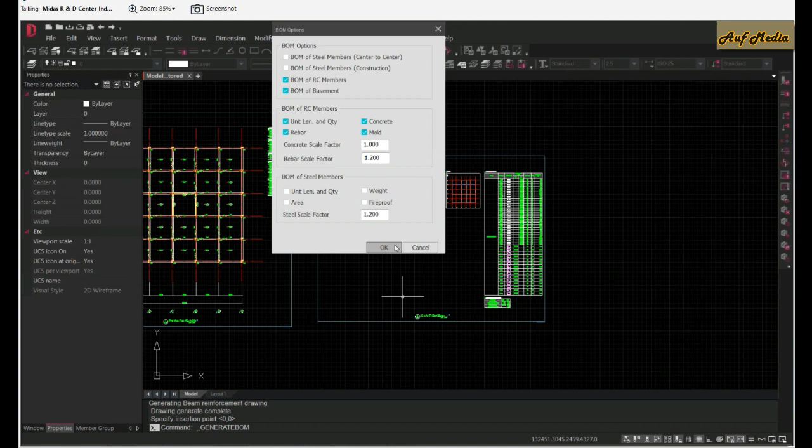And also we'll be able to generate the bill of material in the form of an Excel sheet. So here I'll just create the result for RC members only, and I'll uncheck for the steel. So you can just uncheck all this and we can generate the Microsoft Excel file for the generation of a bill of material.

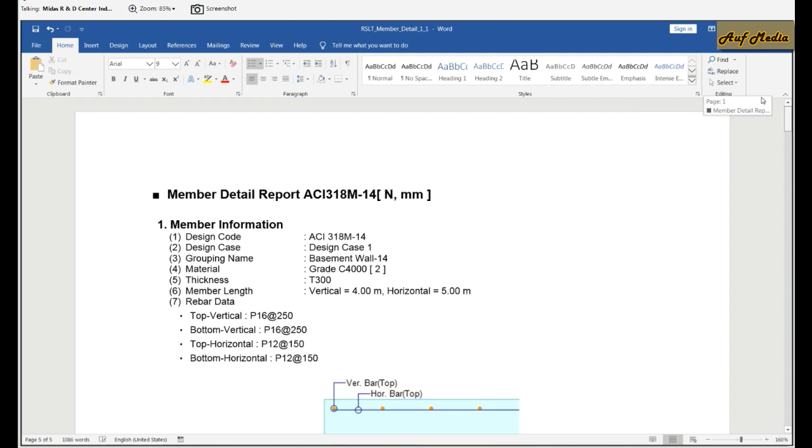We can get the results of the design in the form of tables as well using this RC section option. So this is the result for the basement wall. The basement wall design result is also provided by the program.

In the table format, we can get the reinforcement arrangement, which can be edited and rechecked with the codal provisions. You can even take this information into Excel sheets by right clicking. Right now we are getting the bill of quantity generated in the Excel file format.

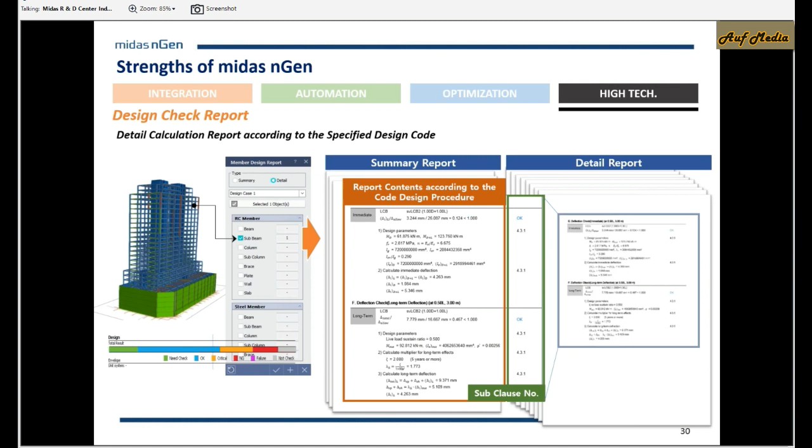Let me get back to the presentation where I would also like to show about the reports. So these are the summary reports and detailed reports which we have already seen, wherein the subclause numbers were also provided with the formula and all.

Now this is regarding the report maker, which I would like to show in the form of a small video here. So you can actually create a template wherein you can provide the information of the inputs and outputs of your project.

It's not necessary to get the entire bulky project report. Select the information that we want. You can even select which members you want to take the output of. You have full control on the font size, on the margins, and what all text information that you have to provide.

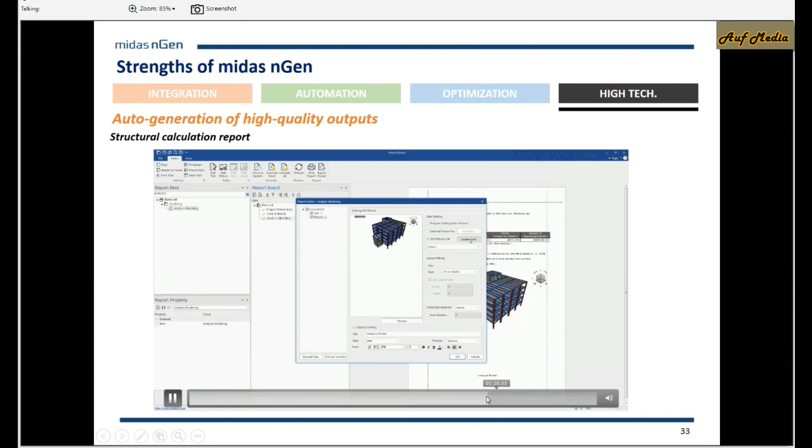By clicking on generate, the entire project report gets generated. You can choose which images you want to include in your result or report. And if you have any modifications in the project, you can generate the entire project report easily and convert that project report into a Word file. So a Word file would be nicely generated for the project.

So in future, if you have a new project, you can open your template. Basically, you can save your template, open it again, and directly generate the entire project report in a very short period of time. So that's about the high-tech output generated by the program.

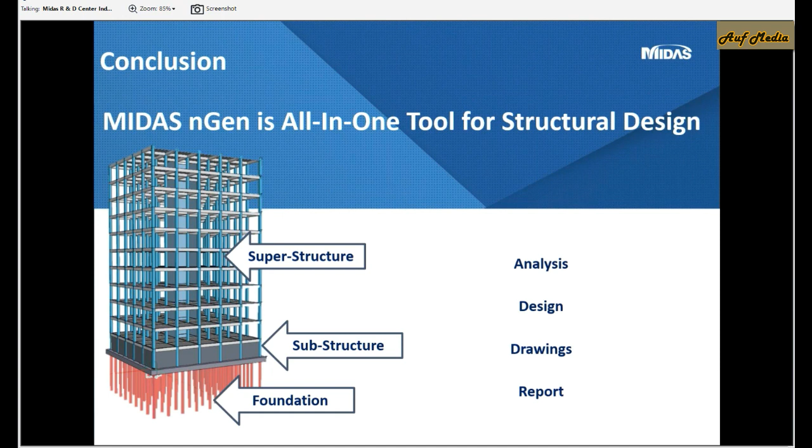Let me talk about some conclusions that we have seen today. We have seen that superstructure, substructure, and the foundation can be modeled in midas nGen for the analysis, design, drawings, and reports. There is CAD Tracer tool for modeling features. Node element type of modeling is also available. CAD-based editing tools are there.

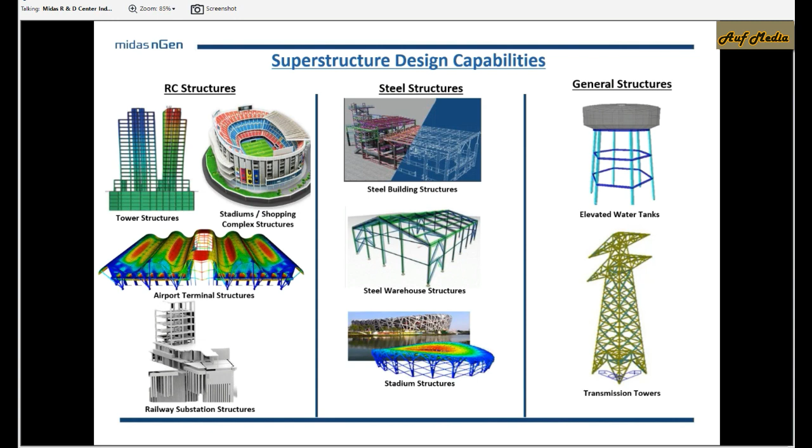When it comes to applications, RC structures, irregular shaped columns, irregular roofs, railway substation structures, and in the steel structures, steel buildings, steel warehouse, stadium structures can be included. You can have general structures as well, like elevated water tanks and transmission towers. We saw that foundations and substructure design is available in midas nGen.

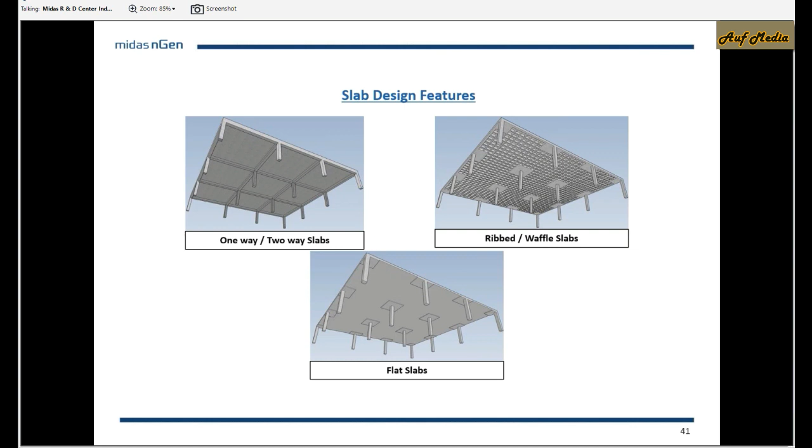And one-way, two-way type of slab design is available. Ribbed or waffle slabs are also applicable here. And flat slabs are also available in midas nGen for the analysis and design purpose. Report generation is available in the form of Word file. You get a summary report and you also get a detailed design report.

So that's about a detailed design report, summary report, and a customized submission report as well. Submission report would probably not require the entire information of these designs. So you can actually just provide a summary result if the design is okay or not good with the reinforcement arrangement.

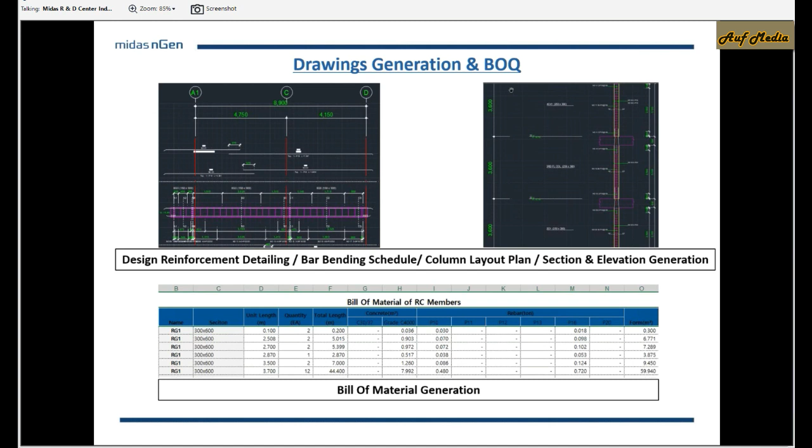When it comes to drawings, you can get the rebar arrangements, longitudinal rebar arrangements, as well as bar bending schedule for beams, columns, and you also get for basement walls and shear walls and slabs and mat foundations as well. And bill of material can be generated in the form of Excel sheet. So here it is generated with us, the Excel sheet result.

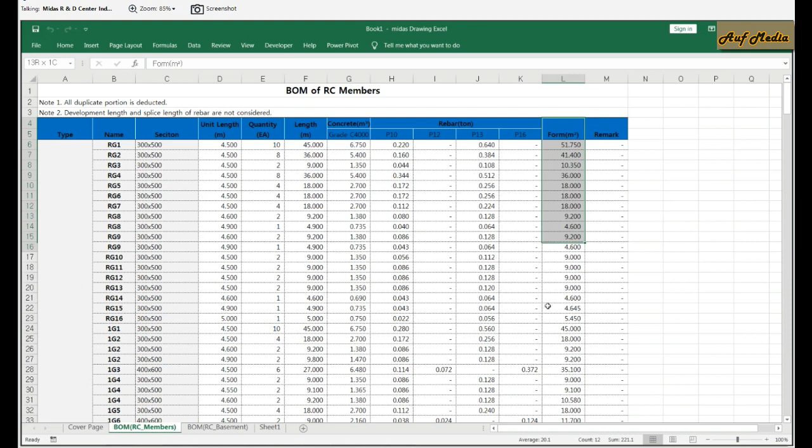You can see this is how it looks, the section, the lengths, the concrete volume in meter cube, rebars in ton, formwork in meter square. You get separate result for the basement wall and the footing and the pile information. So how many piles are there, what is the diameter and so on. So that's about the BOM of the basement that we can get from the bill of material generated by the program. So that's a bill of material generation.